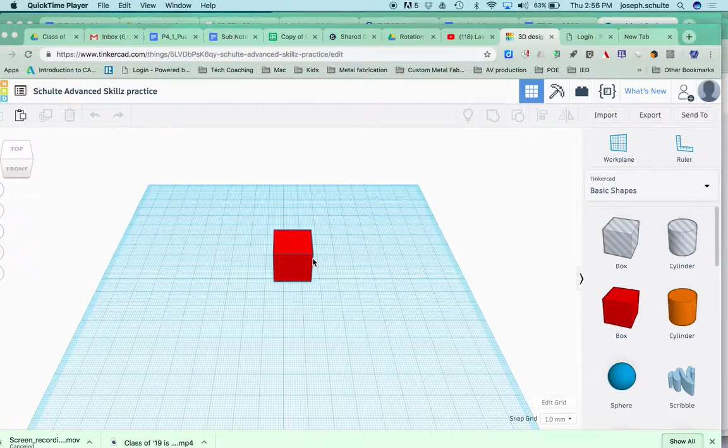All of you have been working in metric units. When you click on this cube, you get handles that show up, and if I adjust those handles, I get numbers. But the numbers are nothing to you because they're like 20 and 20 right now.

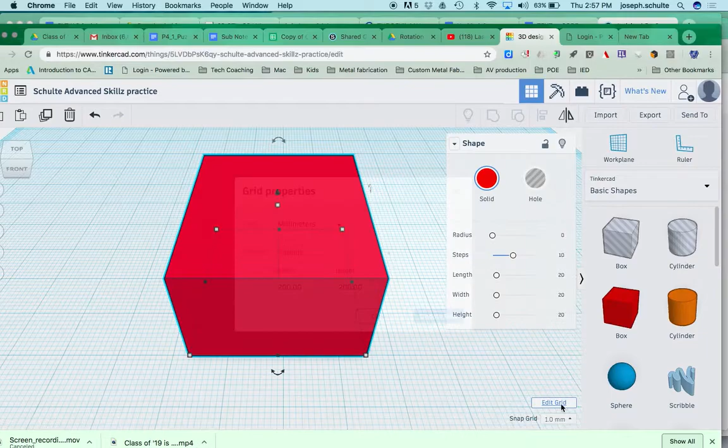Those are actually millimeters, and the way we change that is we go to Edit Grid and change our default units from millimeters to inches. We could make any solution in metric, no problem, and measure in millimeters, but most of you are not that familiar with those units because our default units in America are inches.

The rule of thumb, the width of a man's thumb, is about 1 inch. That is where the rule of thumb comes from, and that's where our standard system is based off of. It's a very poor system. A foot was the length of a king's foot, right?

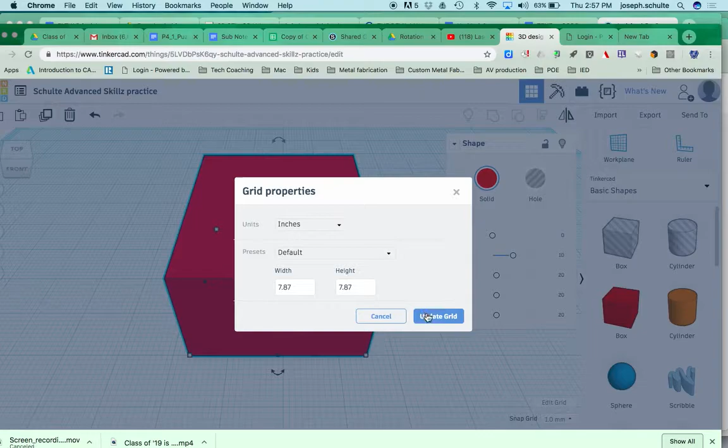Not ideal. Anyway, we're going to switch over to inches here, and I want you to see what happens when we update the grid. We'll notice that now when we grab our corners to adjust, we get decimal inches.

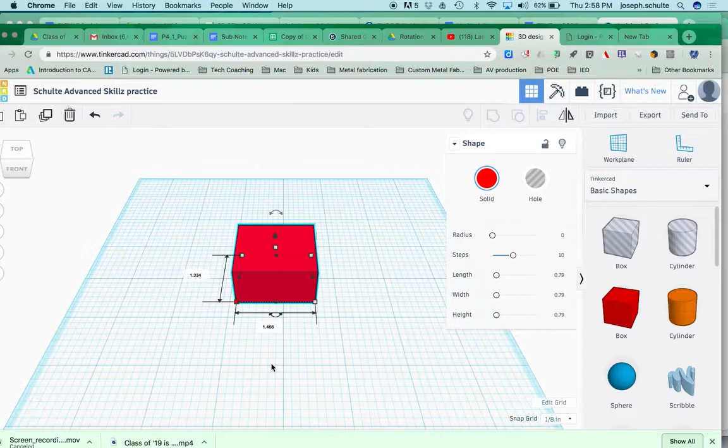Now, I have to see if I can zoom in. Whoa, too far. I'm zooming in on these numbers for you, because on the screen, it's probably really difficult for you to see them. And they don't magnify. 1.466 - whoa, that is a really very finite number, precise, to the thousandth of an inch.

1.466. 0.005, or 5 thousandths of an inch, is the thickness of a human hair. So that's how finite this measurement is getting right now. You need to be able to convert decimal inches, like this is at 1.209, into fractional inches. And that's tough to do, to know how finite it is.

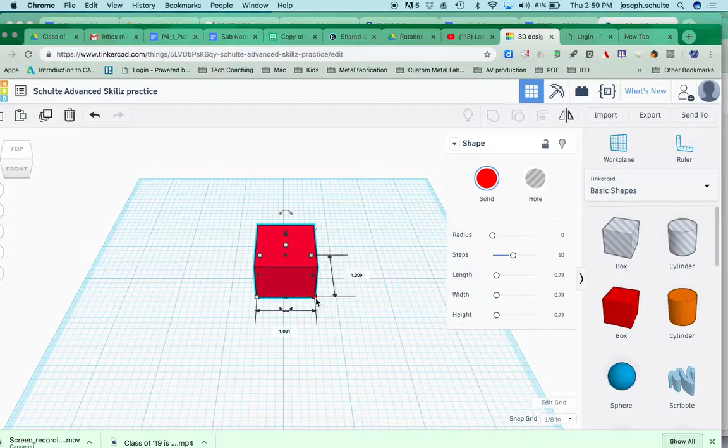Now, looking at the grid, let me tell you this. As a general guideline, the darker blue squares are 1 inch squares. Each one of the itty bitty squares on there is an 1/8 inch. So your sizing to print, the biggest you can make something in this class to 3D print is a footprint that is 3 inches by 3 inches.

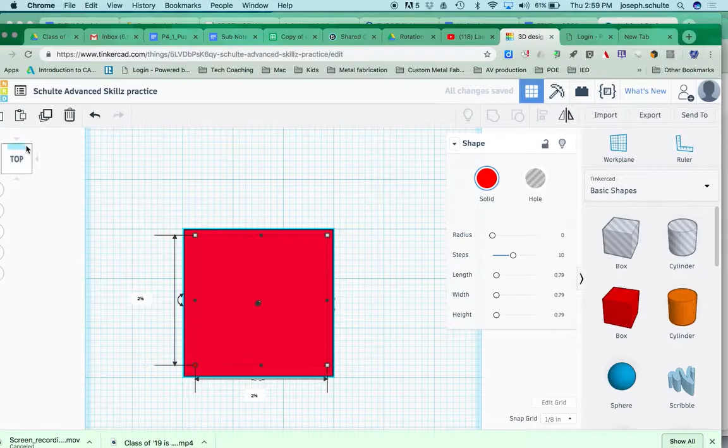So let me drop this into that dark square and that one. And I'm going to go top view here so that I can look straight down on it and size it. The biggest footprint you could print something - and this can't be solid like this, but it can be close - that would be a 3 right there by 3 vertically and height-wise as well. So we'll make this last one.

Oh no, I didn't want that one. Get back to 3 right there. Okay, where is my vertical right there? Does it have to be exactly 3? Let me explain again, or keep explaining.

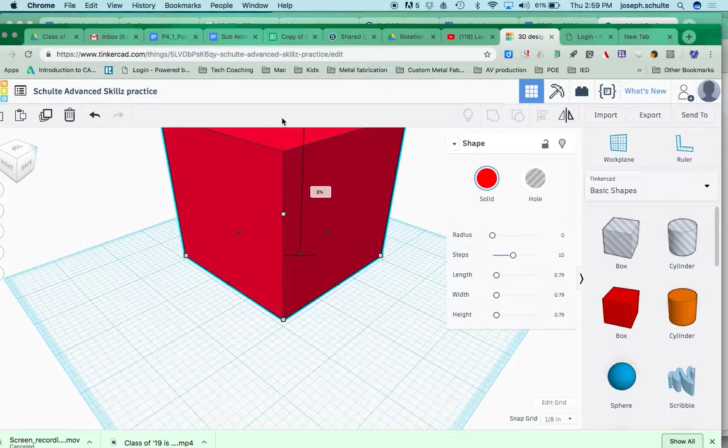This 3 by 3 by 3 is like the glass box that your object has to fit inside. It can't be bigger than this, but it also can't be solid 3 by 3 by 3. Why? Home view - there we go.

Because that would cost about $80 to print, because it is 3 inches times 3 inches times 3 inches, which is 27 cubic inches, and the cost per cubic inch for us to print is $3 a cubic inch. So let me give you one more example of that so you understand it.

If I bring a box out and that box comes out as a 1 by 1 by 1, if I print that box right now, it's $3. That's how much material it costs.

This box that I'm holding up that nobody on the screen can see, the KD box, costs about $5 because it's bigger than a 1 by 1. It has a hole in the middle, so it reduced some of the cost. You have to Swiss cheese your design as much as possible and get rid of as much material as possible to reduce the cost.

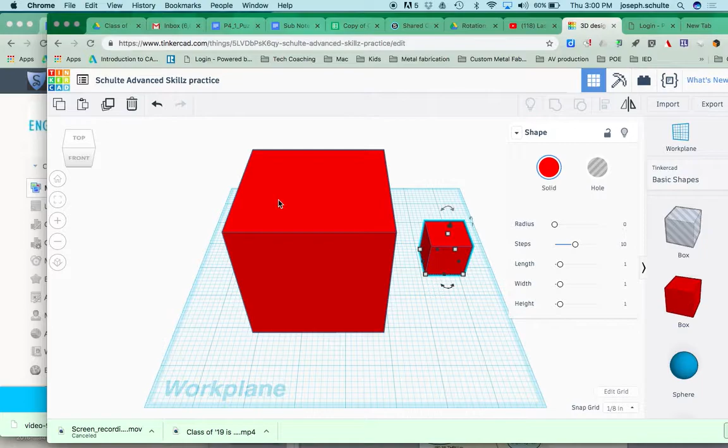So what you've got to do is start using the hole features we already learned. If I make this into a hole and make it bigger, I can get rid of most of the material in the design of the box.

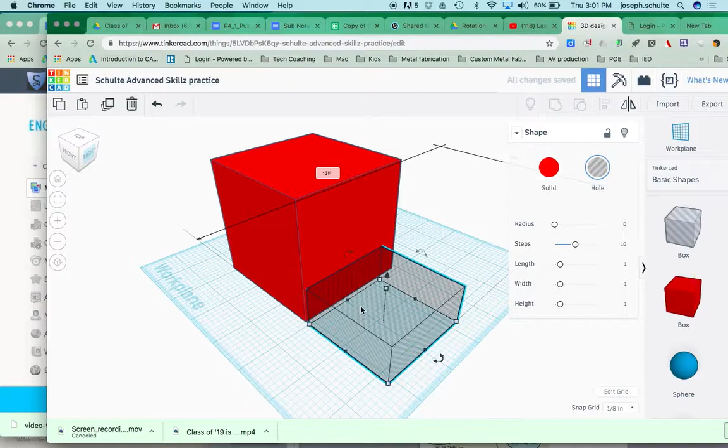I'm going to raise it up off the deck too. There, up here—oh, that's way out in space right now. I'm nervous, let me come back to front view. I'm going to cut the top of the box away here and start to Swiss cheese this, so I can slide this out into the box.

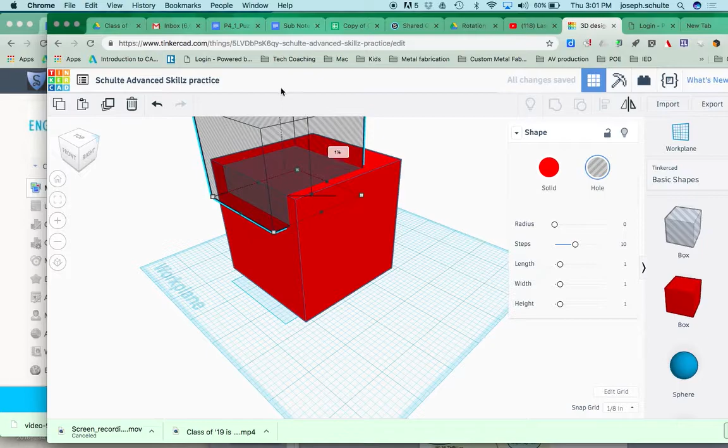Let's say I'm going to make a chair of some kind. How about height? Yeah, it needs to be deeper. I'll move it down. Whoa, trackpad editing, not ideal.

Mouse editing is way easier. You know what's going on? I bet I have perspective view on. Yes, I do—terrible perspective view. Stick with me here, people.

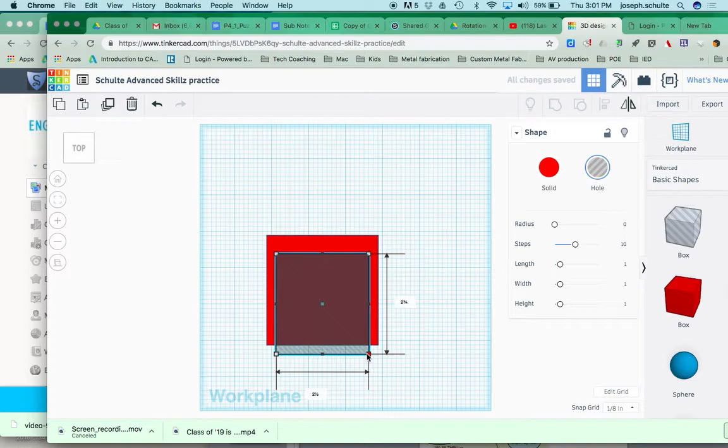So I'm going for that symmetry again like we just practiced, and I got some armrests on there. I'll go back to isometric view or the top corner so I can see. Rotate around and drop this down deeper by grabbing the cone, the black cone.

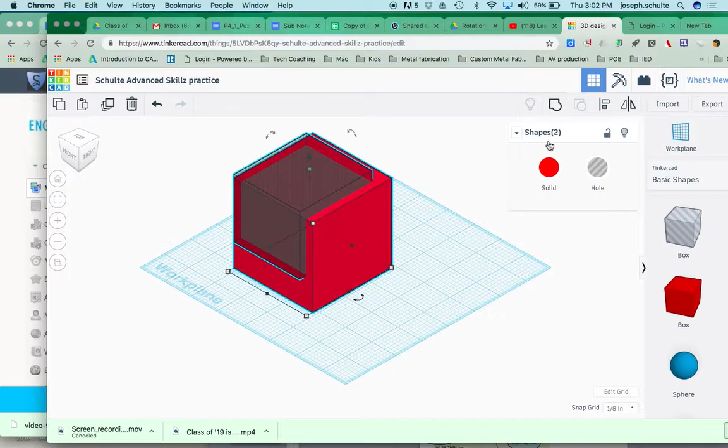Okay, and now what do I need to do in order to make that cut? Select it and group it. Boom, and now I just cut away about $30. Does that make sense? Now if it was a chair, could I get rid of other stuff here?

Yeah, make it hollow. Make it hollow, for sure. I could hollow it out. That's awesome, Trayton—that's actually called shelling. That would be really cool. I could hollow the bottom side.

I could shoot holes in the back side too, because if it's a chair, it doesn't need to be solid. I could put legs on it instead of having just a solid bottom. Yep, I could shell through the bottom too. So you're starting to get it—we want to reduce as much material as possible.

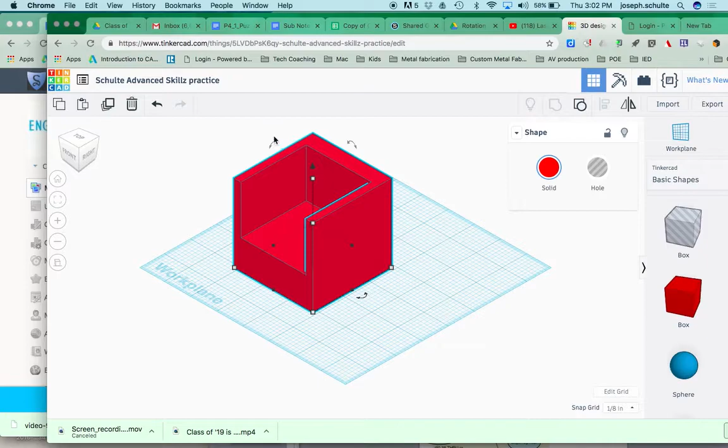So we just talked about two things: changing your units to standard so we can work in the world of inches, and then Swiss cheesing, or reducing your design in material as much as possible.

Part of this is it's going to have to go through a final review with me, and that review process involves Schoology. Inside TinkerCad City there is a list you have to go down with your design, called the Fit and Finish Checkoff. And this is what it looks like.

The first thing is cost efficiency. We just talked about it: have you Swiss cheesed your design? Have you reduced all unnecessary material as much as possible, either through design or cutting blocks of unnecessary material away?

Form: have you rounded corners and edges of all shapes that allow it? Have you added surface embellishment like textures, shapes, maybe your initials or letters embossed in it? We haven't even done the initials or letters. You've done it on backpack tags. I know how to do it.

Good, check this out back here. Let me ungroup. And before I merge these together, instead of just making them really sharp, square edges, why don't I radius those edges to make it nice? Grab this and round those corners off—same with my cutaway shape.

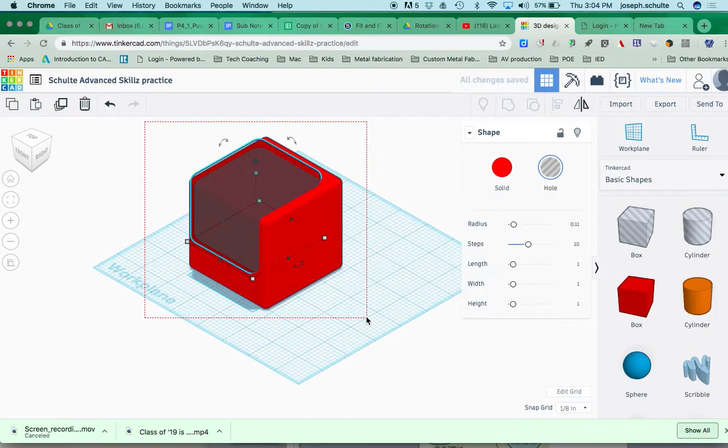And now it's actually going to look like something I would sit in, because the edges are much softer. It would look like furniture instead of a really poorly designed box. And group. Now I've got some rounded edges on my corners, soft edges. So that involves rounding corners and edges.

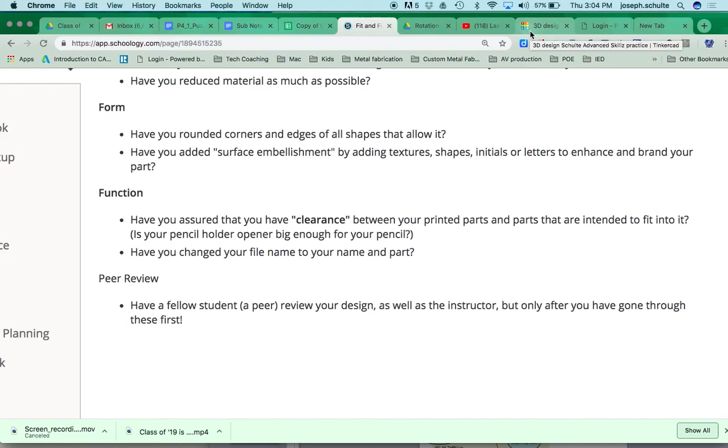Last thing is function, and that's the third video we're going to create, so I'm going to stop this one right now. We went through fit and form—let me see if I've got anything else on my list: units, sizing, cost per cubic inch, and Swiss cheesing. I think we're good. And seam.